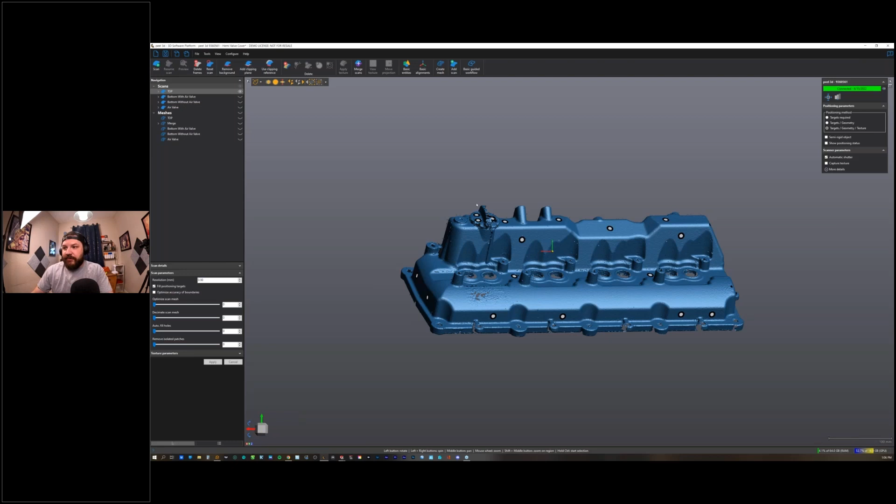For example, if I were to show this cap right here, I can scan it all together, and with this cap I can then export this target matrix, bring this cap, take it out completely and start scanning it, and it'll recognize that it's right here. Now this is probably a harder example because there's only 3 targets. You probably want a minimum of 5 for it to really catch onto the pattern, but I do have an example of what I mean.

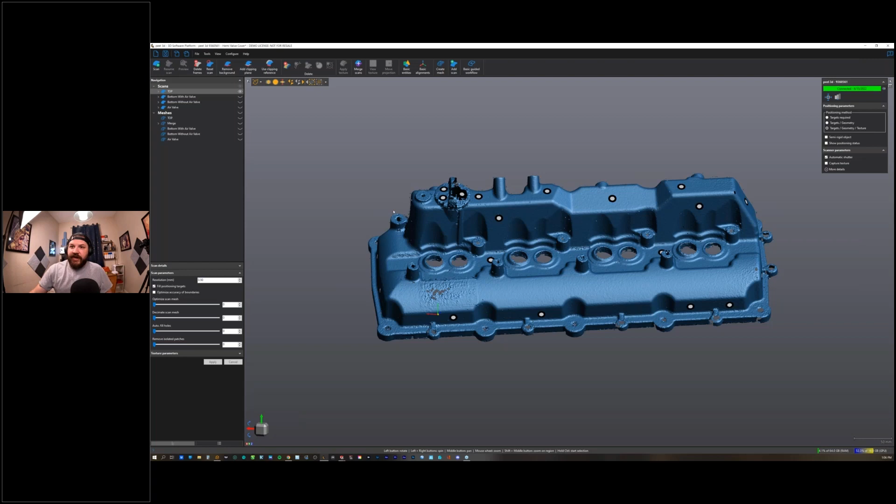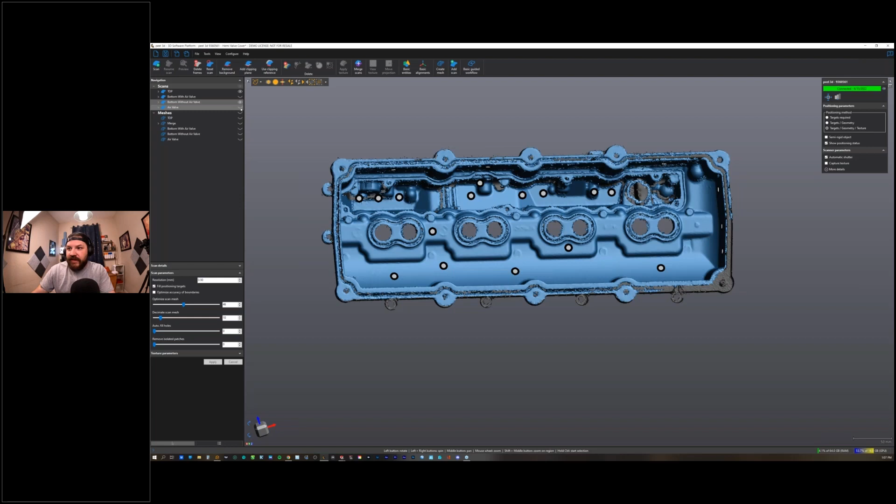So if I were to come and scan this bottom, which I did, you can see it has this valve dome right here for the air, basically for a breather. I scanned it in this position, and then I was able to actually take the cover out, but I'd leave these scan targets in. So whenever I come to the valve portion, I can then just scan this all by itself and it'll show up in position exactly where it's supposed to be.

So this can be used if you were scanning a wheel on a car and you're scanning the whole car but needed as much data as possible. You'd target up the wheel and the tire, and target up the car. You would then export your target matrix and start a new scan. When you start a new scan, you import your targets, so it would be all the targets you had for the full car. You can then take your wheel off, put it on the table, and start scanning it there, and it scans as if it's still on the car.

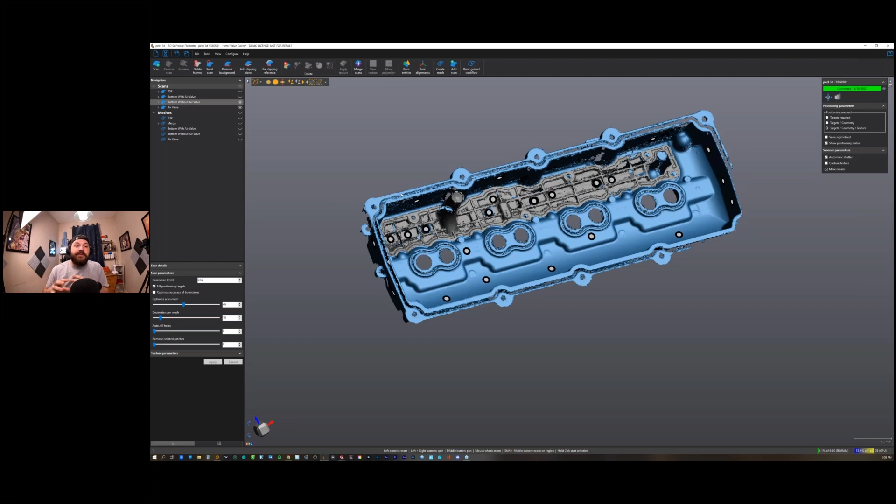So I do this a lot when I'm doing interiors. I would scan all the interior components that don't move, but when it comes to the doors, I can then scan the doors separately and be able to get under the jambs, into the hinges, all around, basically just get way more data and have it be in place than if I were just scanning it normally.

So we can kind of go through a project. We can start scanning this, and I can show you my workflow of where I would start. What we'll do is start a new scan. And what I meant by importing the targets is you just come to import, and previously, like this would be my last one that I did with the air valve.

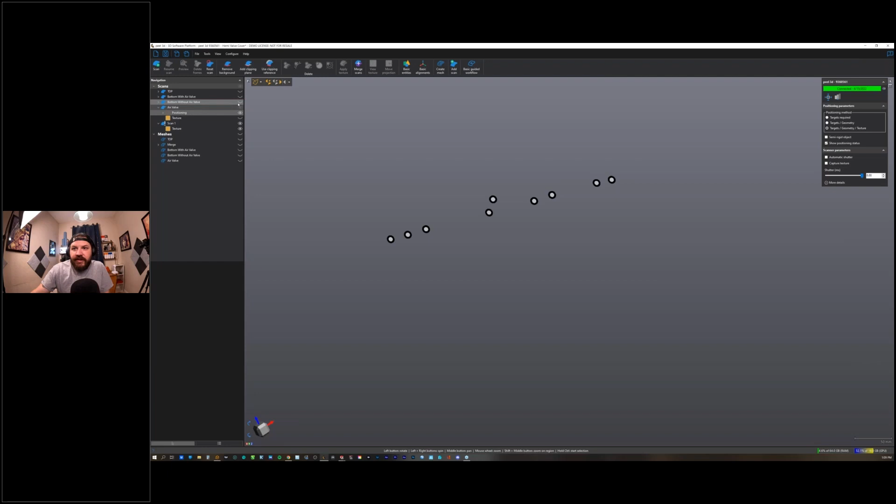If you see, it would probably be this one that has just all the targets in it. I usually, scan by scan, export these positioning targets as I go. This has basically all the targets that I have on the part, and then you just come to export, and you export positioning targets.

You can see right here, as I went along, I have my different alignments, and then just my subsets of targets as I collect more and more, because I don't like to overwrite the files. They're really small file sizes, so I just like to keep them in succession for redundancy.

So when I come to the new scan, I will import the positioning targets, and I'll go with my latest. And you see it brings in the targets.

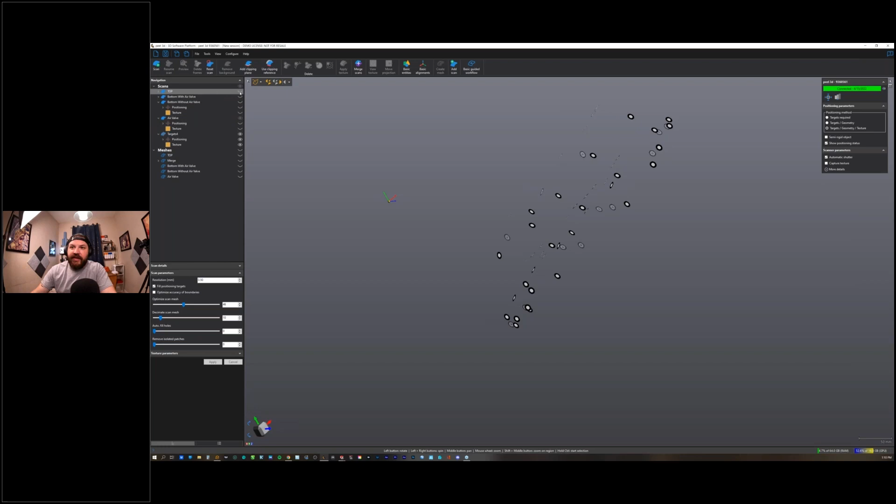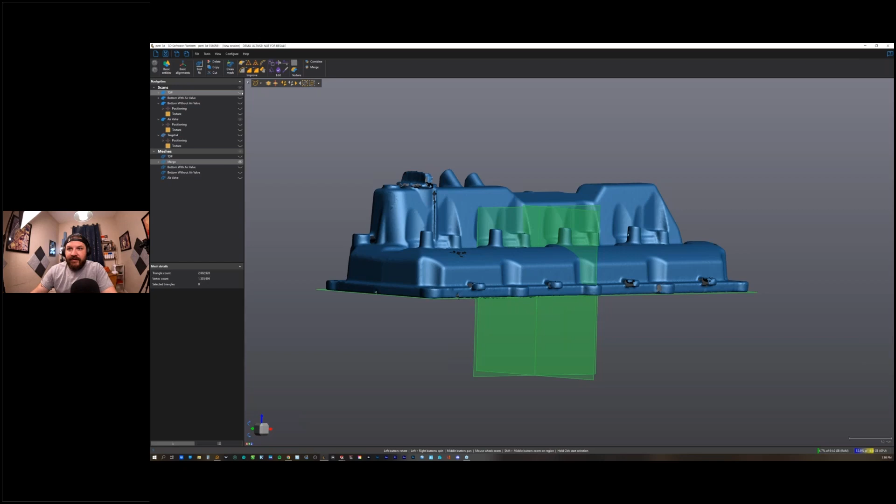And even going a step further, if you were to bring this top into the meshes, and you'd already gone through the process of reorienting and realigning and getting it so that it fits exactly where it's supposed to, you could then take this alignment and apply it to your scan, because that's where it originally scanned was.

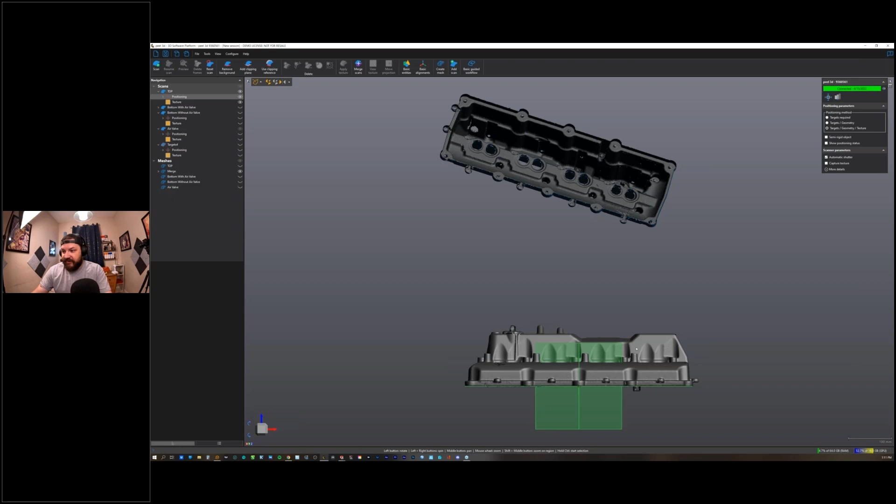And then you can export your targets again, and now all of your targets and everything of that nature is going to show up exactly in your predefined orientation. So that's basically a quick bypass of my workflow, but I'll try to show you real time as best as possible.

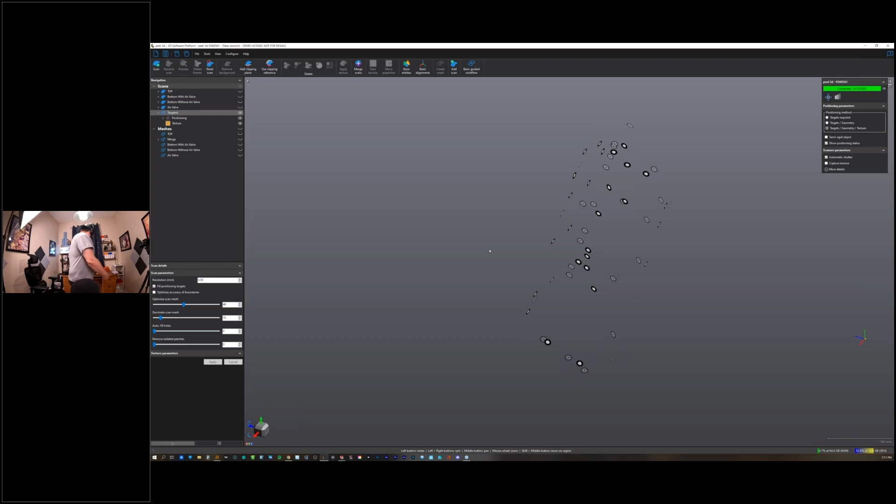So we have some new targets and or a new scan. I hope you'll be able to see and hear me, my mic is stationary. I would come, import the targets, and hit scan. So now we're ready to scan.

As you can see, I have a valve cover right here, and I have it on a turntable. This is good for small parts and little stuff like that. I also have these, I think they're called paint pyramids, little pyramids over here too. I have targets on them so that they'll just be more reference data as you go.

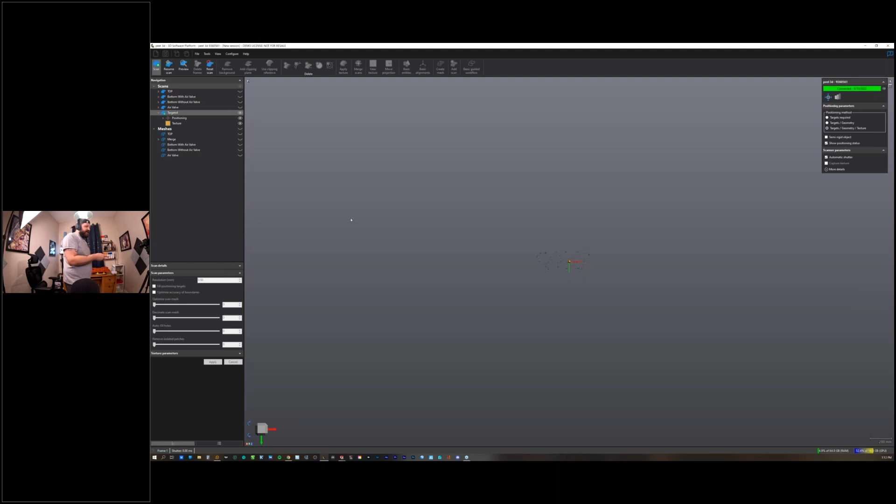It gives you a small little point that you can raise your part up on, and it makes it easier for cleanup and just keeping it off the ground so that it doesn't collect any of that data off the floor and mesh it up around the edges. This is a cool little trick and hack that I got on Amazon, just these little paint pyramids.

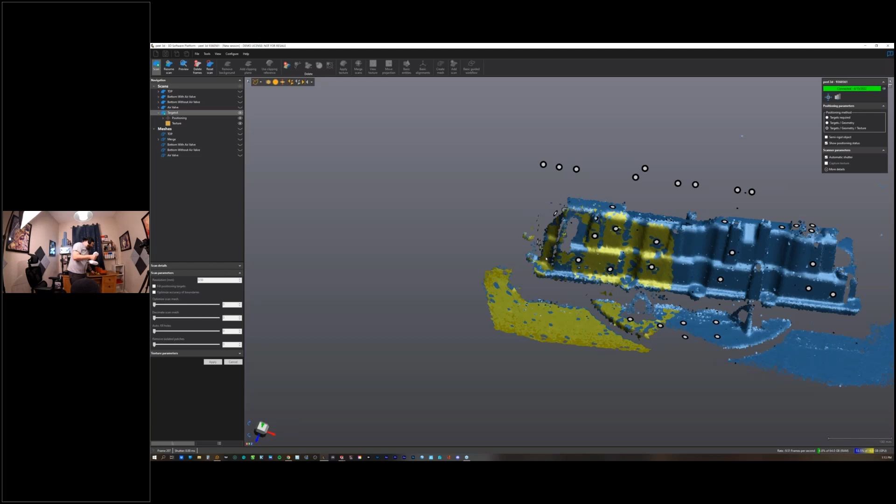So again, you can see that I have my positioning targets. So then very easily can I come in and rescan any of these parts. There we go. And that lets you, the more and more that you use targets and bring these parts in, and the more data that you can get, the easier it is just to merge meshes together.

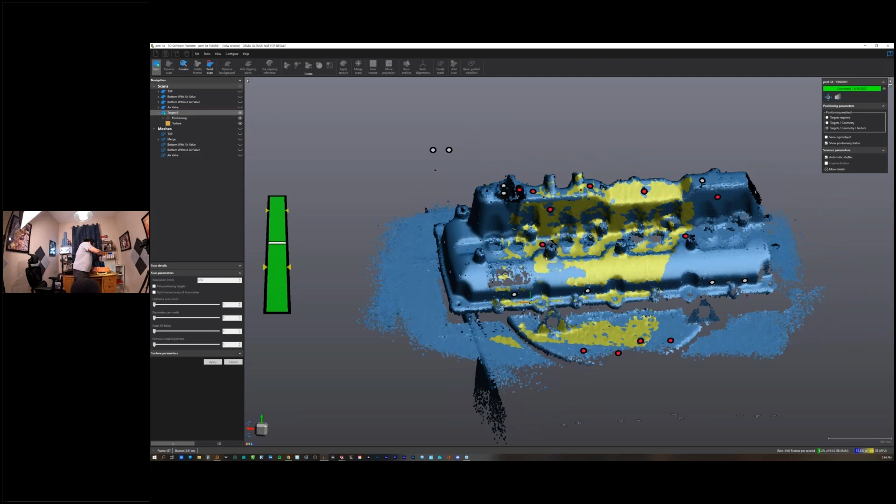So if you ever do have any issues with it being shiny or just not picking up, I recommend this, it's a scan spray. This is by a company called AESUB. They have about 3 or 4 different kinds, and they even have it where you can shoot it in a big gun for big projects. If I was doing a whole car, it's a pneumatic gun that you pour the liquid in, just a pneumatic paint sprayer.

But all it is, is a very light coating. It says it's just basically like a light dusting of very, very fine snow. And they've done testing on it to where you cannot measure a difference between the scan spray. Does not affect the thickness of your part or anything like that. And the best part is that it sublimates, which means it dissipates over time. So I've used this on $500,000 cars, and you're not going to have an issue.

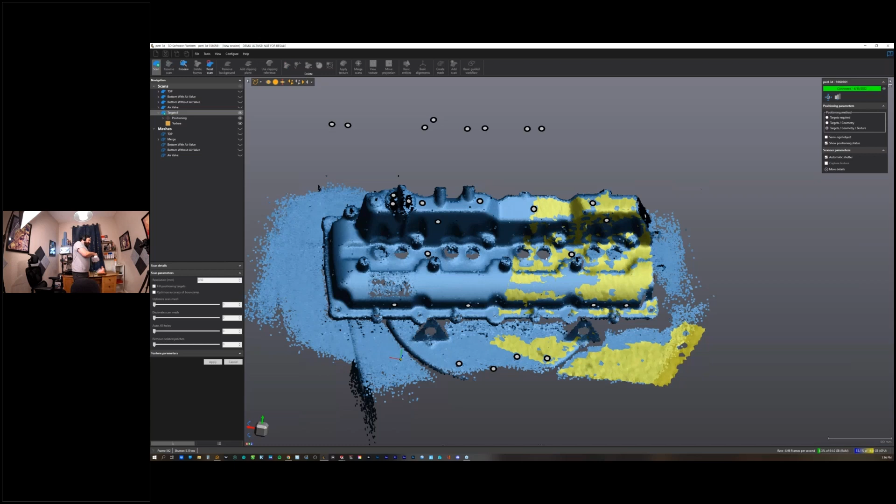But it does severely increase how well this scans. So it's not always needed, but it's definitely a tool that's always good to have. Like you can see for that spout right there that I'm trying to pick up.

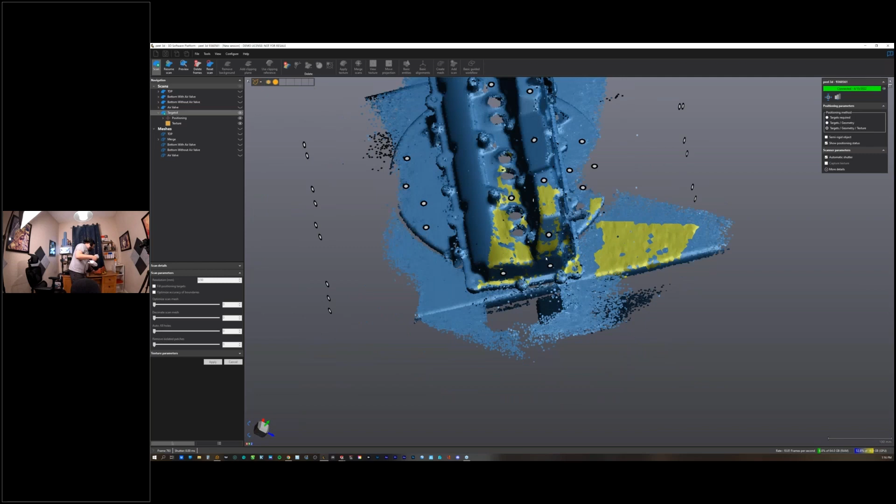It doesn't quite pick it up because for one, it's a different color. So you'd have to kind of sit and hover, especially if you're on automatic shutter.

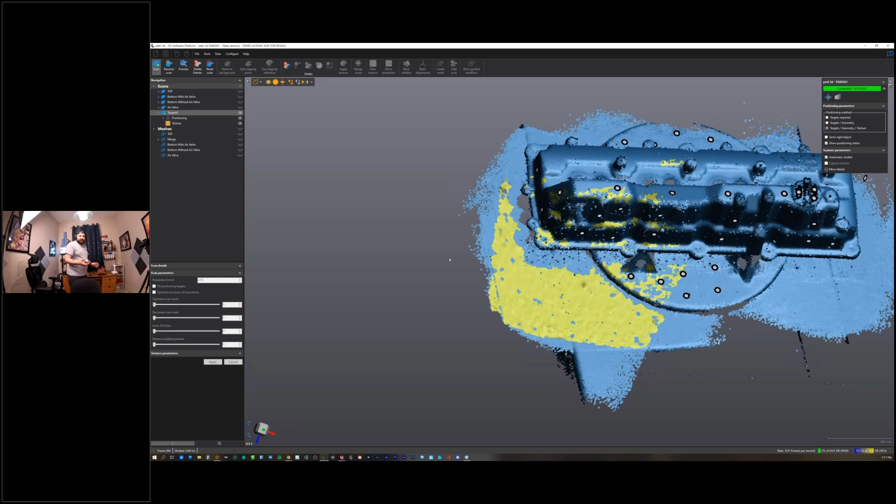What resolution are you scanning at, Jeff? I believe I'm scanning at 0.5 millimeters. Okay, that's so good. Typically, unless it's like a big broad side of a car or anything like that, for anything with small detail, holes, and intricate data, I usually go for broke and use the smallest resolution possible so that I can get the most data possible.

But as you can see, it's not quite getting this little spout right here. If I were to spray it, give it a little bit of love with the spray, you can see it picks it up a lot easier.

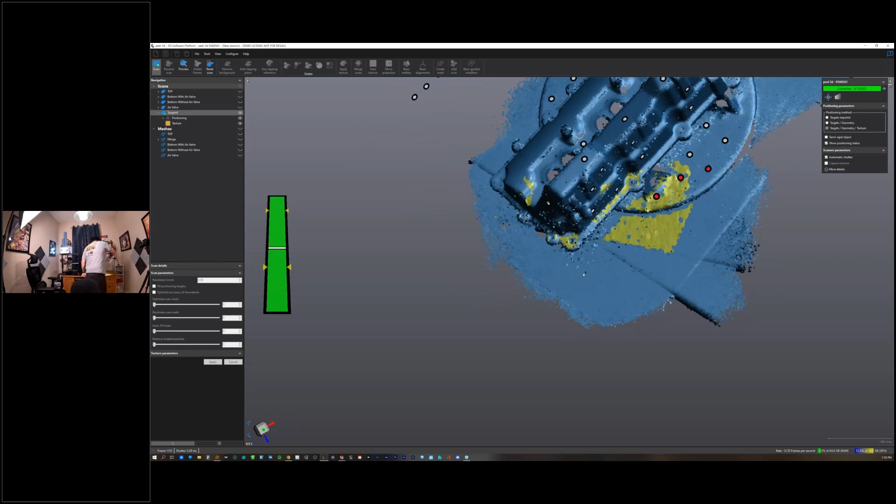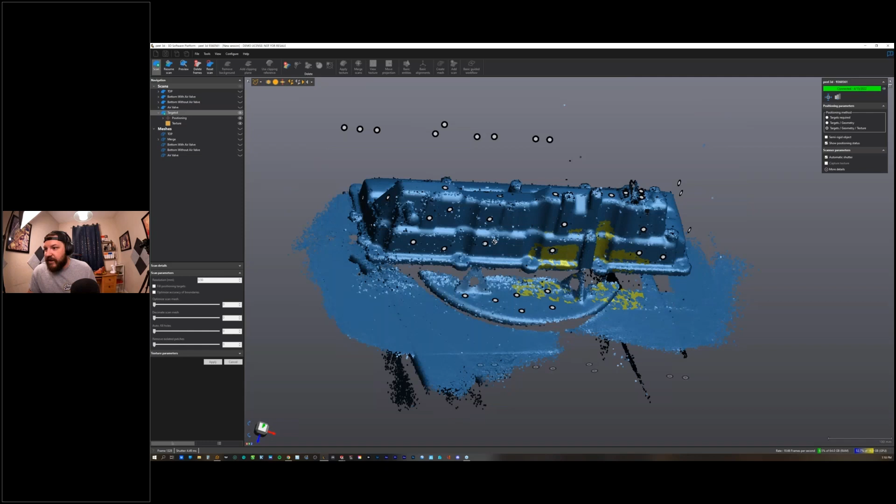Since I have automatic shutter on, I kind of want to sit and let it hover over and let it pick that up. But as you can see, it then began to start picking up that spout, which is actually kind of a shiny metallic silver. Since I was on automatic shutter, if I let it hover around more, it would eventually pick up all that.

And then from here, let's go ahead and stop. It's going to take a second to update, but I'll show you my cleaning process from here. Yeah, when we're in preview mode, it always looks a bit blurry. But don't worry, everyone, it will clean up better than that.

Yeah, it'll just take a second. I've got a lot of resources going on my computer right now with the scanning, the webcast, and a few other files that I have ready and open.

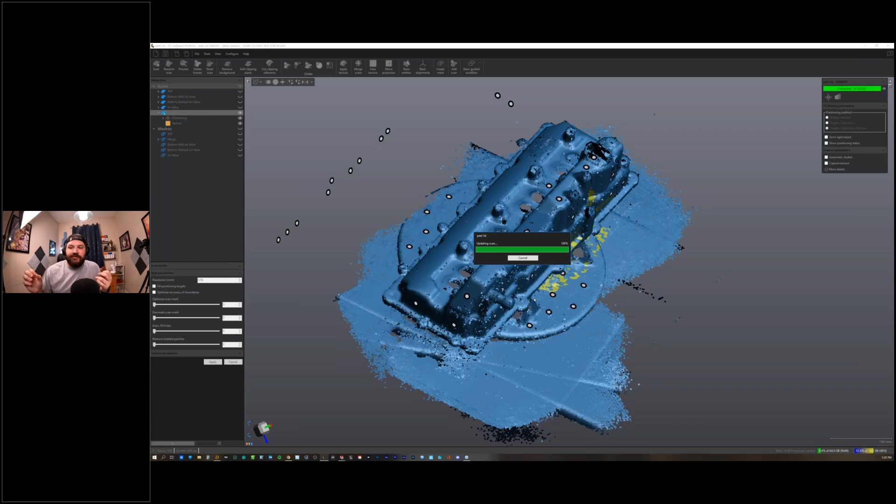Typically on my computer, one practice I like to do is having just a fresh state of the computer. I try to have as minimal services running as possible, and I try to do a fresh restart to keep it going. I'll even turn off the internet, and I have a few other programs I use to basically limit the services of my computer, because I want this thing running as smoothly and efficiently as possible, not waiting around. I don't need to be checking my Facebook or anything like that while this is all going. The quicker I can make my computer, the more dedicated processing I can give to the software, so the snappier it's going to be.

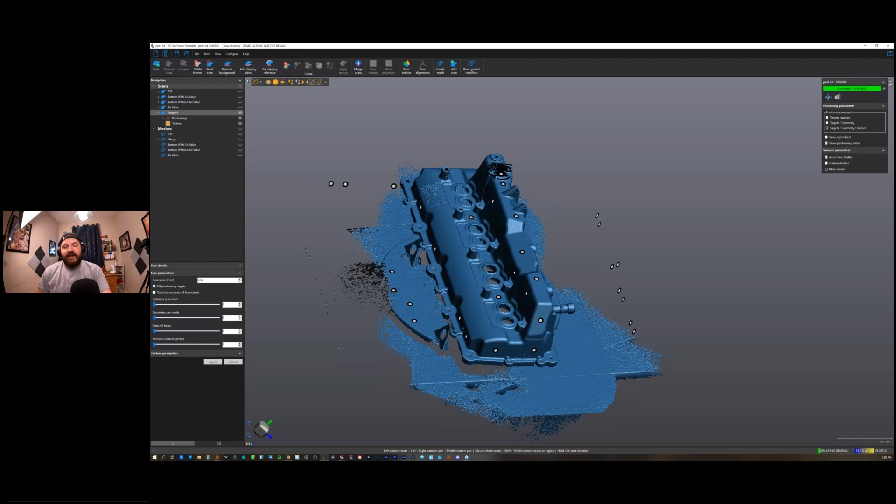I can tell you, I've used a fair amount of scanners, and the Peel software is definitely as snappy as they come. It's very impressive how much data is actually in all of this.

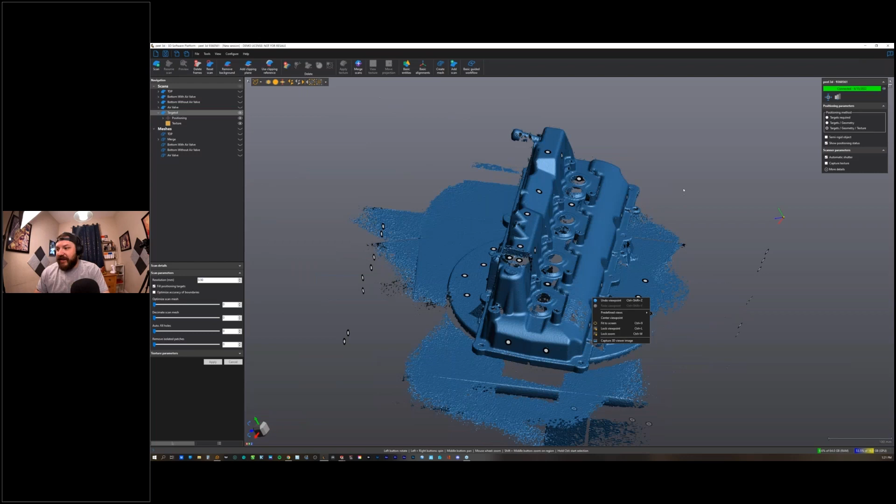As you can see with the triangles, since there's a point, and I didn't quite get under there too much because I'm really focusing on scanning the top, that makes cleaning up a lot easier. So I can just come up to Connect and basically grab all the important stuff that I need.

I don't need any of this down here from the table or anything like that. I can just go and keep only, and that's going to run and delete all that table. Apparently part of the cap that I have on there looks like it too, but that's not a big deal.

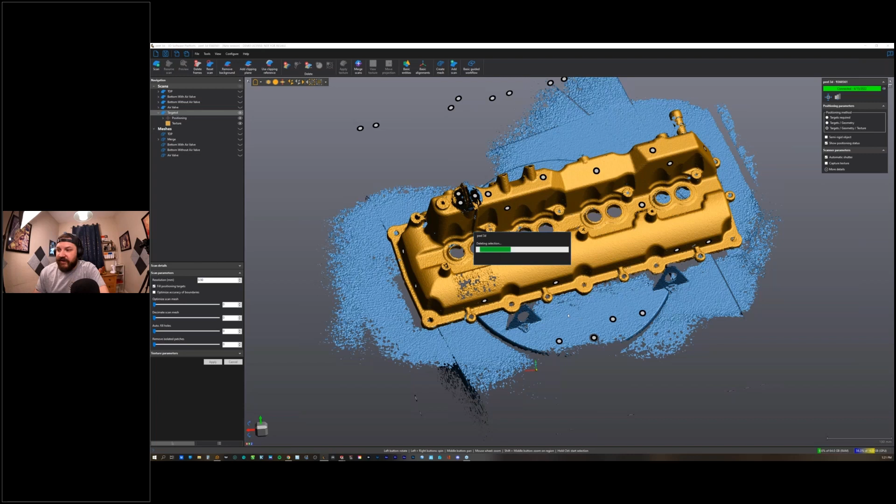But yeah, that's the big benefit right there to those little pyramids. Because if it was just sitting on this turntable or on the table, I'd have to really get in close and trim away all around here. I'll tell you too, if you do have holes and fine details - I'm doing this just for the sake of it being a little quicker - but you can optimize your scan mesh and optimize accuracy of boundaries, and you'll get a lot more accurate boundary data as it goes.

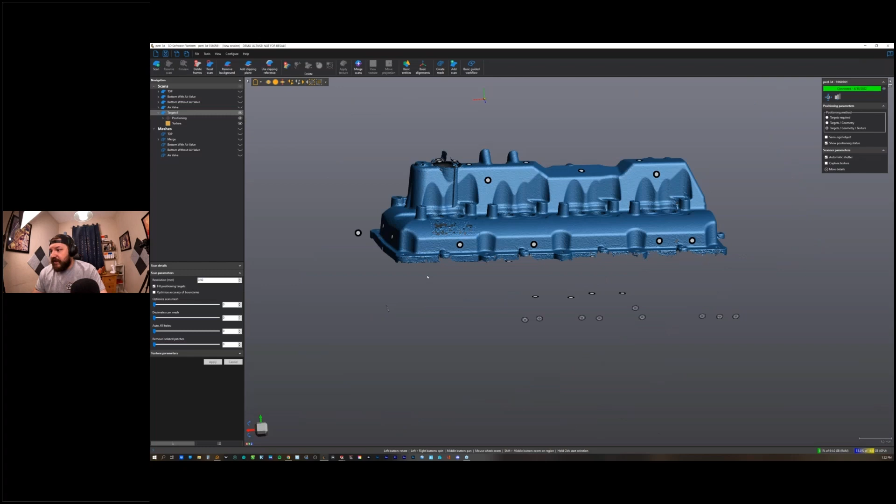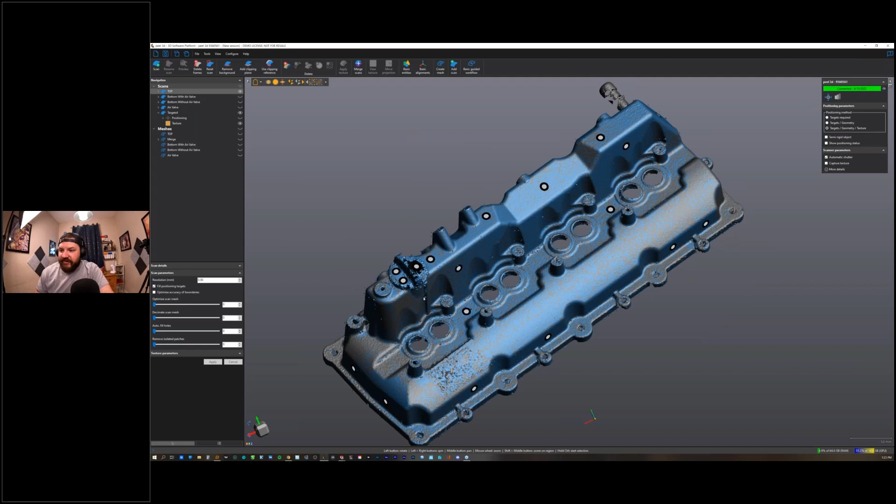So here's that scan. Just in the 5 minutes or so that I was showing you, I have a really good base already. If I were to take that, and say I've scanned the top already before, it's just more and more data that you can eventually merge together and really make sure you've captured everything.

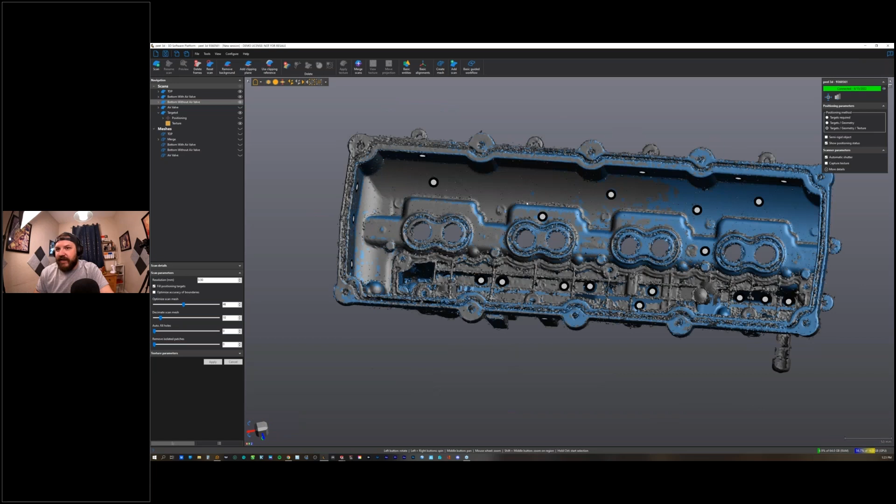So then you can start showing the bottom, and you can see that multiple arrays of data, when you merge that, you'll have just about everything on top of this part that I could ever need. Like I said, if I were to have the optimized accuracy of boundaries, which just takes a little bit longer - and I don't want to just be sitting here watching this thing load - you would have very, very accurate data to bring in.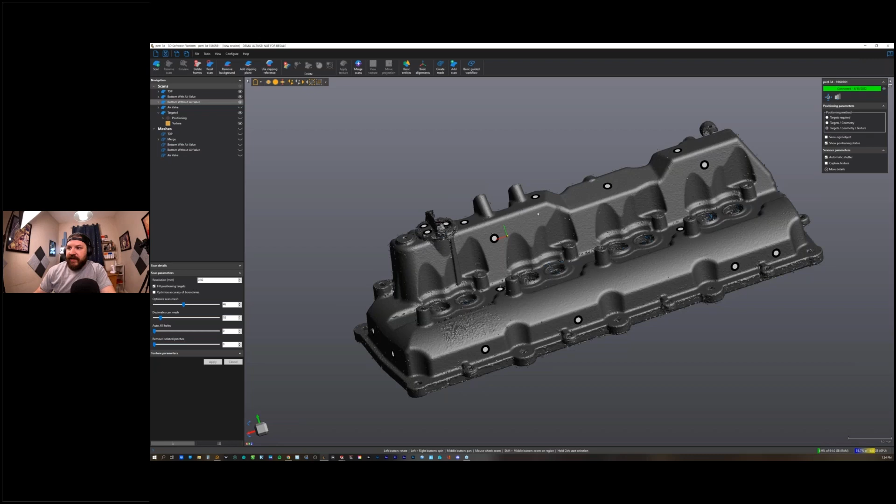So I actually have a different software than the Peel for being able to manipulate the mesh and stuff like that. This is the Peel software right now. It's on a demo license that's not giving me all the tools up here.

So I'm going to switch over to that real quick, and it'll give me all the tools that the Peel software does have. So Jeff, basically we'll be using a VXmodel from Creaform. It's the equivalent of our Peel to CAD. There are a few differences, but most tools and principles, ideas are the same.

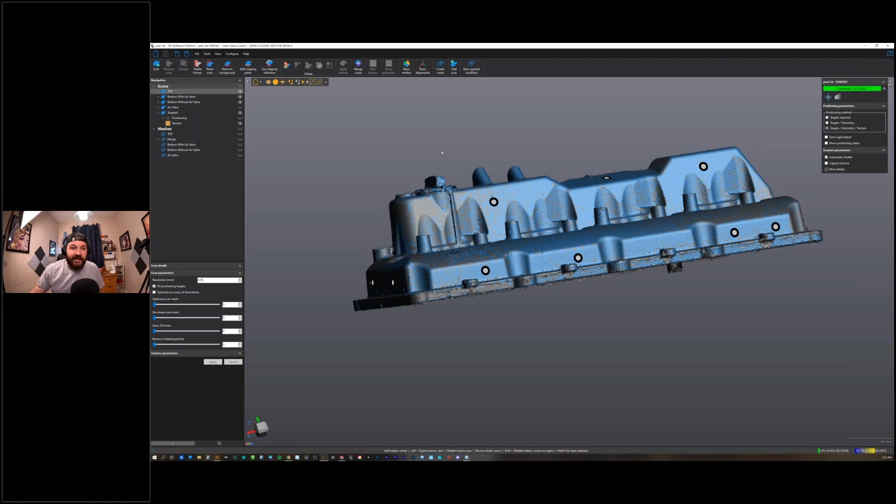Yeah, it's mostly user interface differences. I haven't noticed, and maybe you can tell me, Marie, if what they are, but I haven't noticed any of the tools being different. More or less, just kind of the layout of the process of scanning with my Spark is just a little bit different than scanning with the Peel. But when it comes to the tools and all that stuff, I haven't noticed. There's no difference in the capabilities.

So we'll open this up, and like I said, all the tools are the same over here as the Peel. So yeah, the first thing that I would do in cleaning this up would be to come to clean mesh, and I'll even lower the parameters.

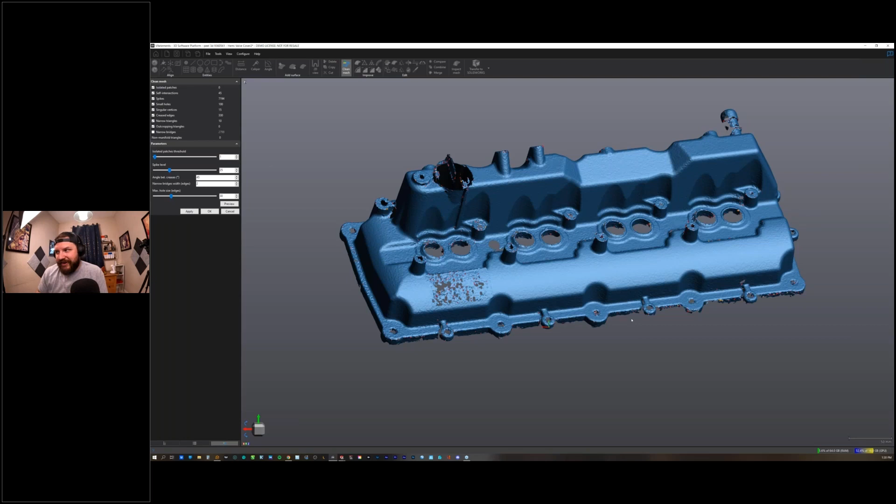And I typically don't go with the automatic isolated patches. I'll do it on one, which picks up very, very little, just because I like to choose myself what data it deletes rather than it just being kind of automatic.

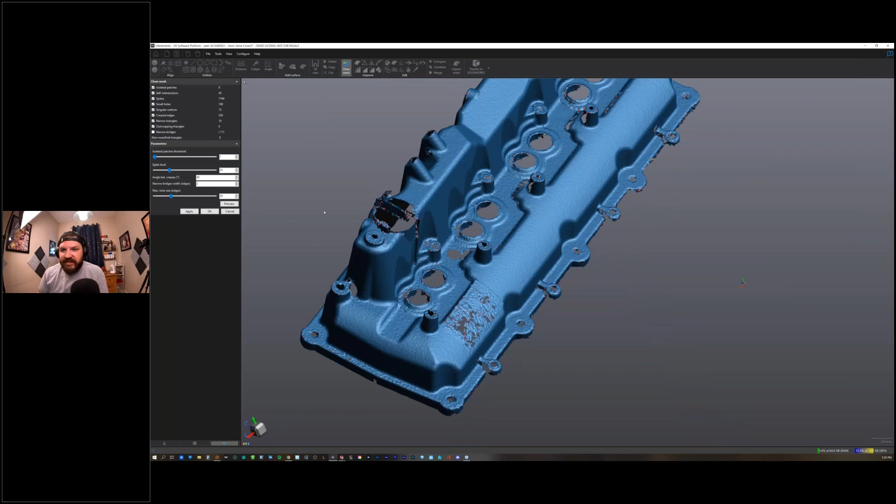I will do it for the max hole size. You do have to be careful, especially with working with parts that have holes in them that you need to take advantage of. I typically leave that around 30 or so, but you can always ramp it up, and whenever you preview, you'll see all the yellow around are all the holes that it's going to fill automatically. So you just want to be wary of making sure that you're not filling in any holes that you don't want.

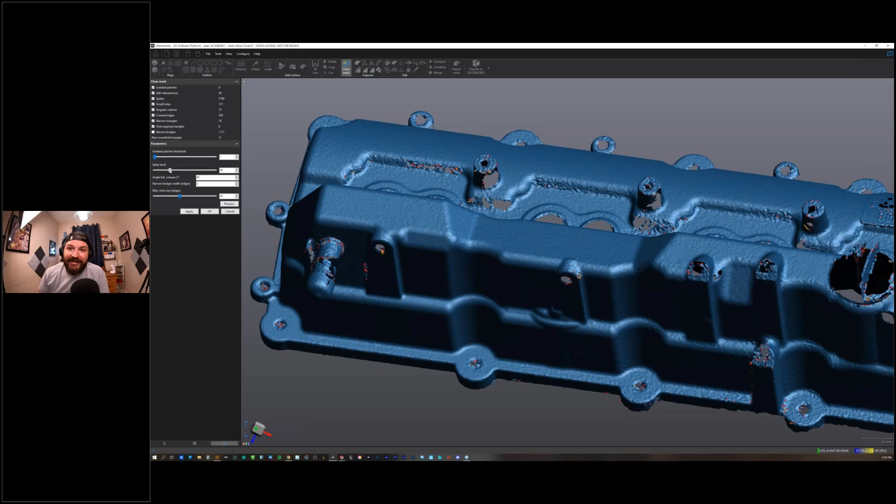And then for the spike level, I typically like to ramp that up and kind of get a lot of the noise reduced a little bit. That'll be my first process, and let that run and take care of all that, any kind of creased edges or intersections or anything like that, and it just cleans it up a little bit, gets a lot of that dirty data out of there. That would be my first step.

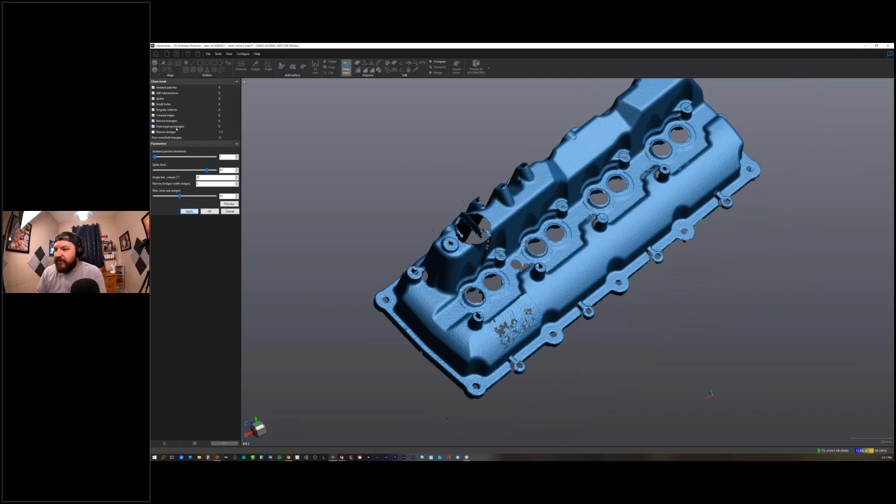And then I would come over here and click this little widget here on the bottom, and this gives you a lot more options of viewing. So one trick of this that I didn't realize was there for a while was clip view. And this comes in handy in scanning too, especially for me whenever I'm doing interiors of cars, like say I've basically scanned the entirety of the car and I realize I don't have some data over there on the kick panel.

But whenever I try to scan the kick panel, it just basically shows me the back end of the cab and I can't see where I'm scanning. So what you actually can do in that case is it basically orients to the projection of your screen, and you can clip view, and it just slices right through.

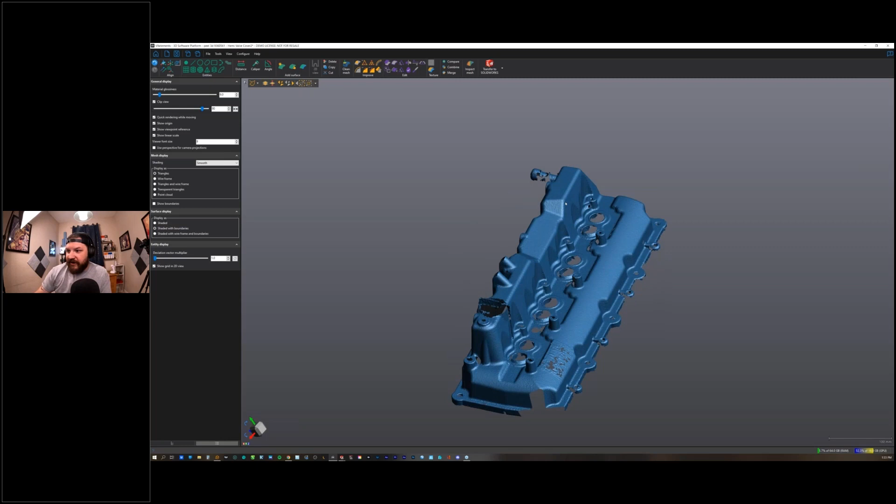So if I was looking at that kick panel, like say the kick panel was over here and all the cab was right here, I would be looking at it in whatever angle I want to and just hide all that data, and now I can start scanning the kick panel or whatever you need.

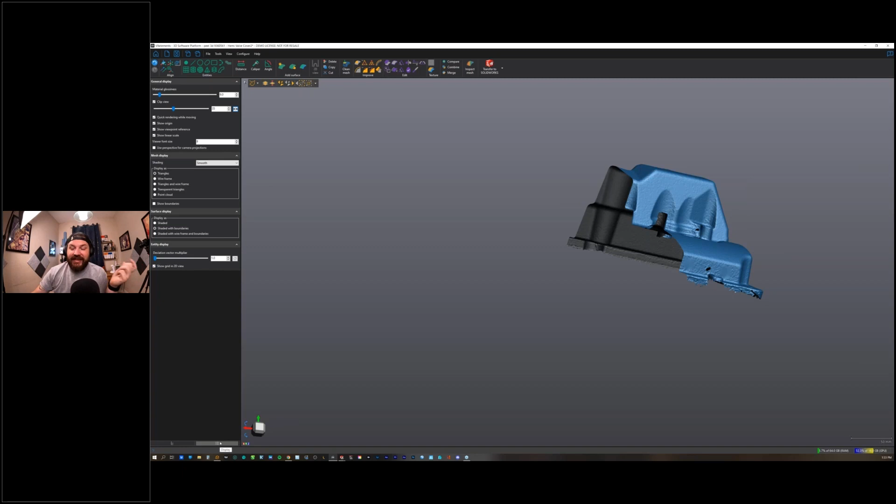But I actually didn't know that was a feature for a while, because honestly I didn't know this little toolbar down here was down here, and you can access this even when inside of your tools. So that can become really handy for whenever you need to get into those hard to see places.

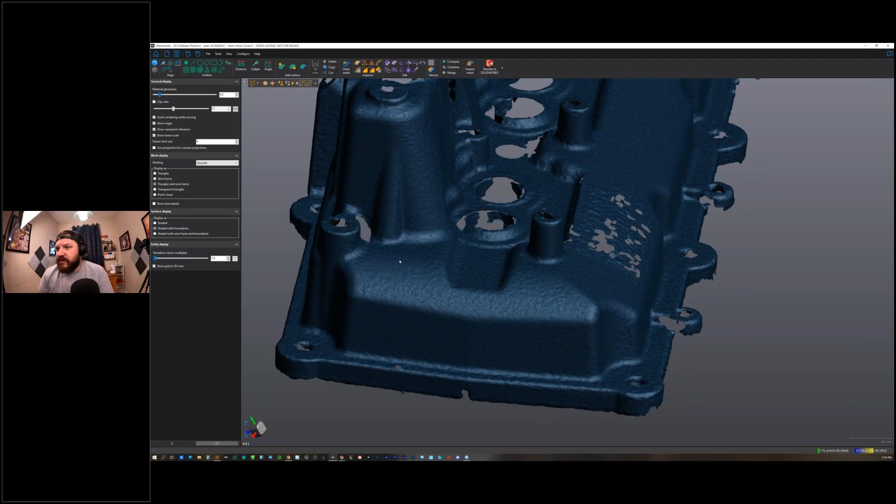But you also have your viewing options here too. So sometimes I like to come in here to be able to see how the triangles reacted and how the mesh is working on it, especially when it comes to decimating and stuff like that. It gives me kind of a nice visual cue of just how clumped the data is.

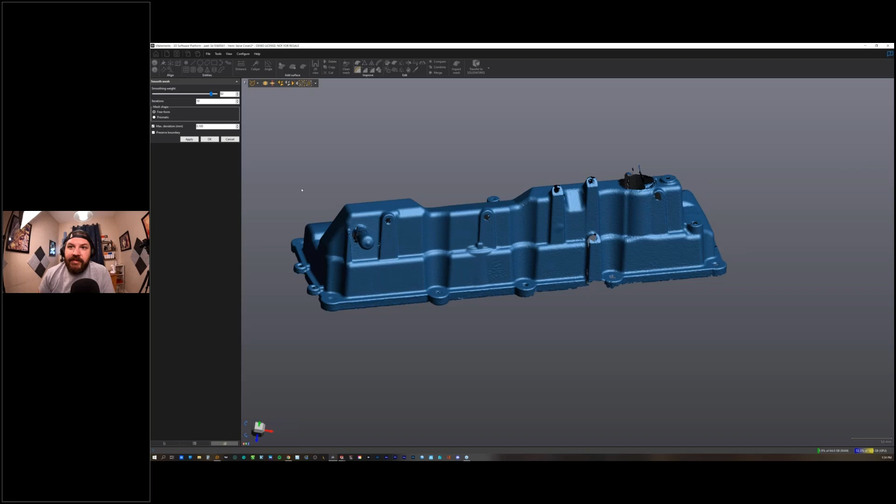Typically, I will go through a few more steps similar to smoothing mesh. So I'm usually not afraid to put the smoothing weight pretty close to top, and I'll run through a few iterations of it to make sure nothing gets distorted too much.

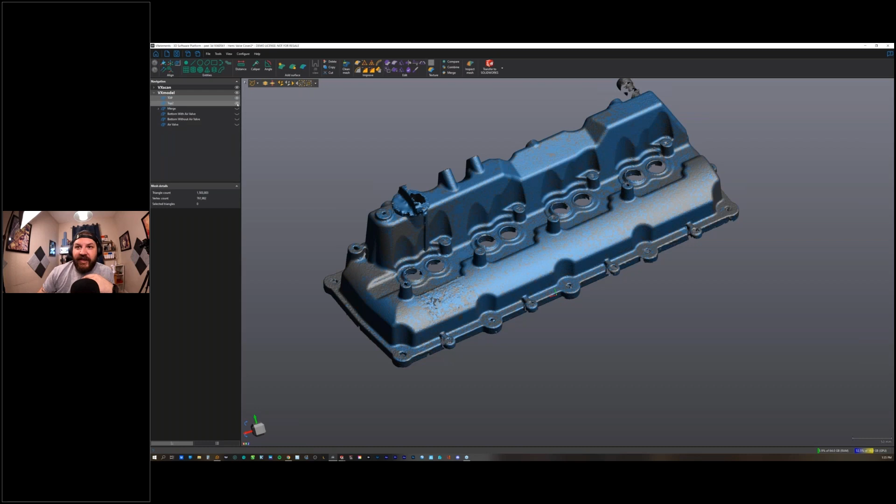Another thing I like to do, that I didn't do in this case because I've already done it, is whenever I bring this from the peel scan to the peel model, I'll usually take that first scan and basically not touch it. Then I'll duplicate it, and that gives me a master of all the data. That way, in case I delete anything, it's a backup, and it's actually a redundant backup because all the original data is up here in the scan.

But what I'll typically do on that first master, which I'd name 'master' as I go, is probably just do that first initial clean mesh, just so it gets rid of a lot of the noise and the basic stuff. But I don't want to start manipulating the mesh on it until after I duplicate it.

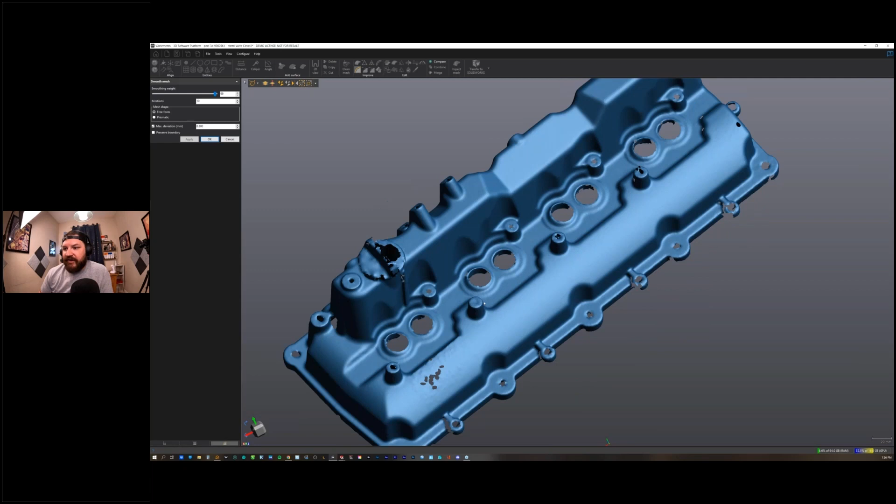That way, especially when it comes to smoothing, let's go ahead and smooth this out. Like I said, I'm typically not afraid to run that up, and I'll typically do preserve boundary. I'll play with that depending on how well all my openings are. If it's a really crucial part, I'll keep it pretty minimum, but if it could use a little love, I'll iterate it up to 0.2 or even 0.3 sometimes. You can see once I apply it, it really takes a lot of that noise out. Even at 0.1 it ends up generally smoothing it all out. But I'll typically go between 0.2 and 0.3, especially on outsides of cars. You'll get a really nice mesh that way.

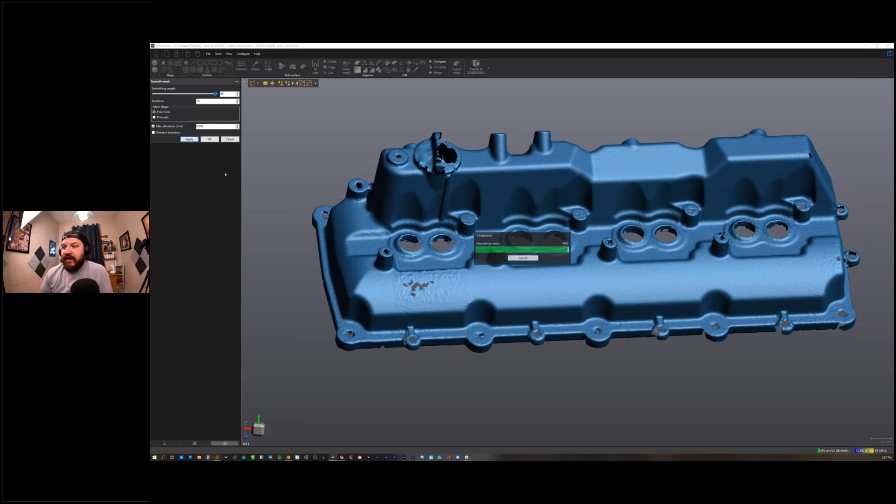And this is why I like having the masters, so I can toggle and make sure nothing's severely changed out of whack or anything like that. It's not going to move stuff around so much that you're losing data. It's just a really good tool.

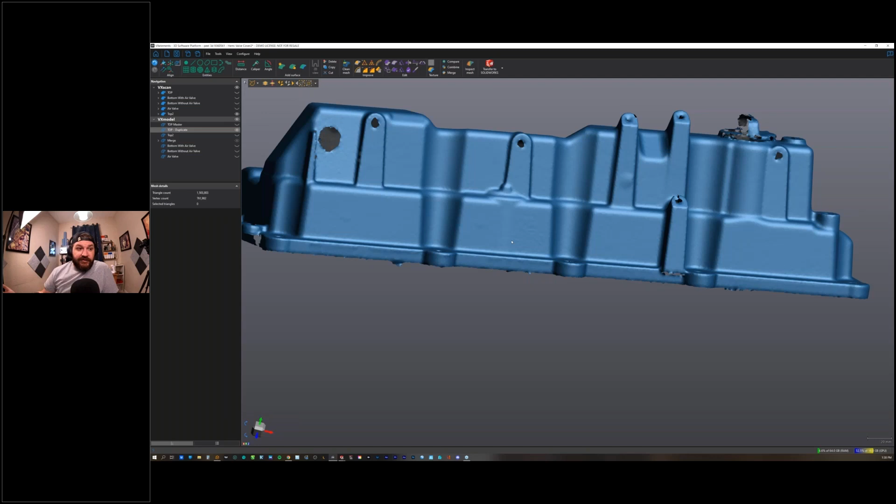Another tip with your targets: when you're placing them, keep them away from edges. If you think about it, whenever you're scanning, it doesn't actually get the data of the target — it puts that target there, and whenever you finalize or end the scan, it will fill those target holes. As you can see right here, I have this target, and I can bring it over.

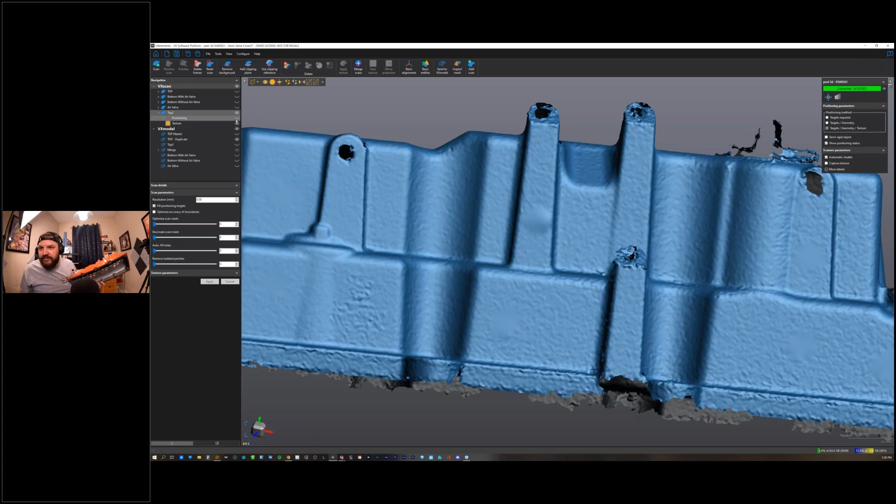This target right here is just a little too close to that edge, so whenever it was scanning... let's see, I go to top 2. Oh, I can show you right here. So if I were to turn these targets off — oh, it's already done it. Typically, if you're still in the scan, you'll be able to just see a hole.

So basically, you just want to keep those away from edges. You don't want to wrap these targets around corners or anything like that. You just want to keep them — the best practice is to try to find nice flat spots. That's why I avoided this area right here, because it has kind of a roll to it. You can put them there, it's not going to be the end of the world, but since this had so many flat surfaces, that's typically what I'd go after.

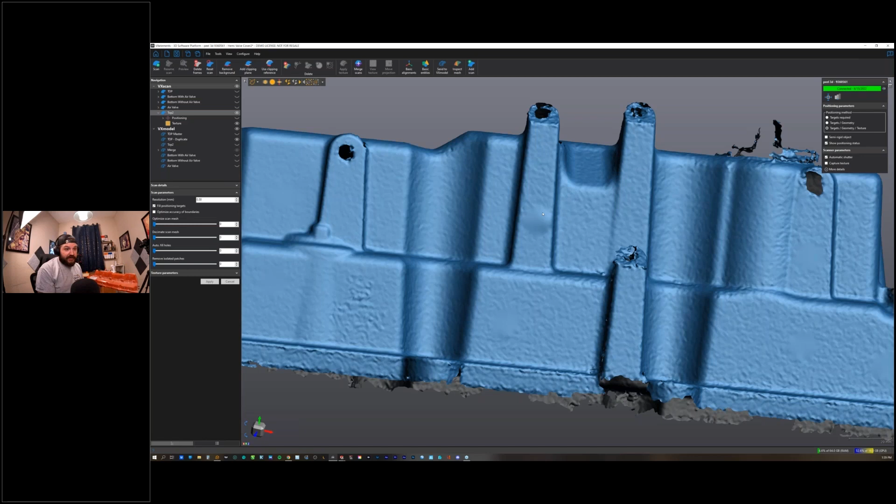So that's why that happened right there, just because I had that target a little too close, and whenever it filled the hole automatically — which you can actually turn that feature off too, if that becomes a problem — you can turn off the fill targets automatically and do it yourself with the power of the fill hole tool, or bridge it with the fill hole tool. You'll get a little more control that way.

And second, if it's just one... if it's a full car, I could have a whole box and a half of targets. I could have 750 targets. I'm not going to want to fill all those in individually.

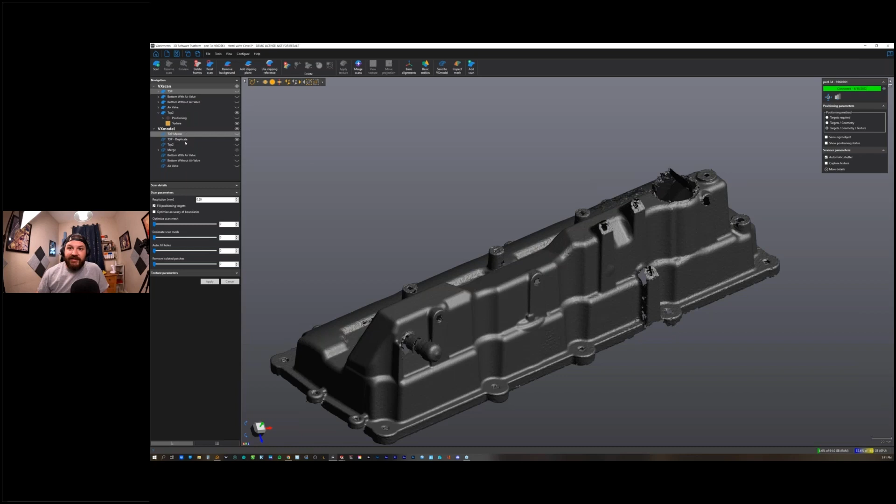So I could come up into the scan again, bring that piece in as another file, chop away everything, and basically just give me that little section of where that hole is that I'm avoiding, fill that in manually, and merge that with the previous scan. That way you don't have to do the entirety of the scan. The ability to copy and paste these models so quickly — it's invaluable.

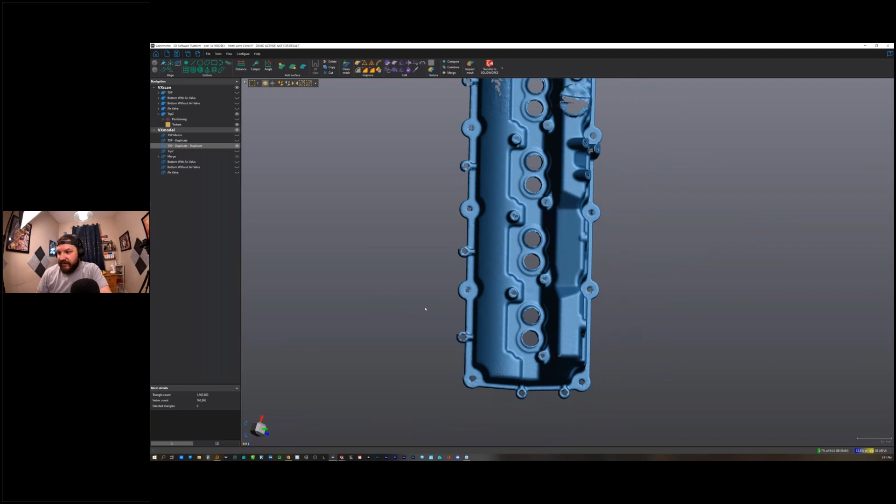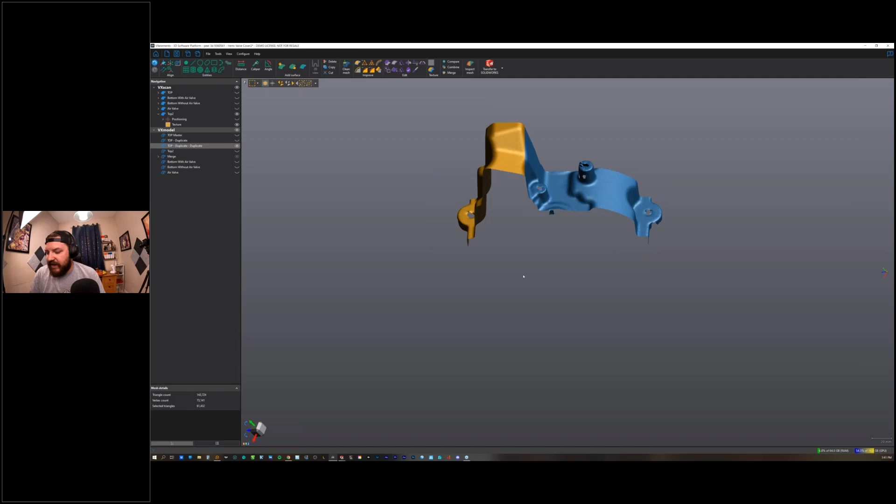Whenever I'm done cleaning up a scan, I'll have copies on copies on copies, because I'll take this and duplicate it, and now I can very easily come in and work on just a very small area, because maybe this hole right here is all I need for inside SolidWorks or anything like that. It's very powerful to be able to delete and work on just the one section you need, without slowing your whole computer down trying to work on just one little section. And since it's just a duplicate, I still have all the data, no problem. So it'll run smooth.

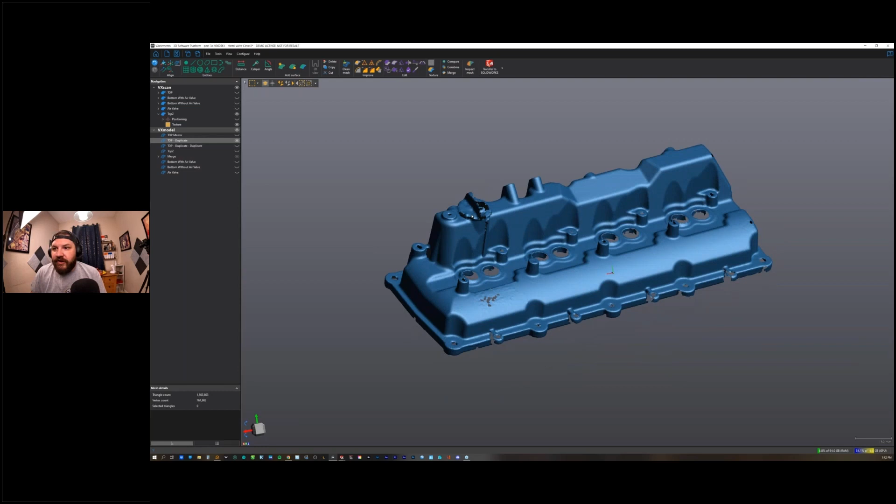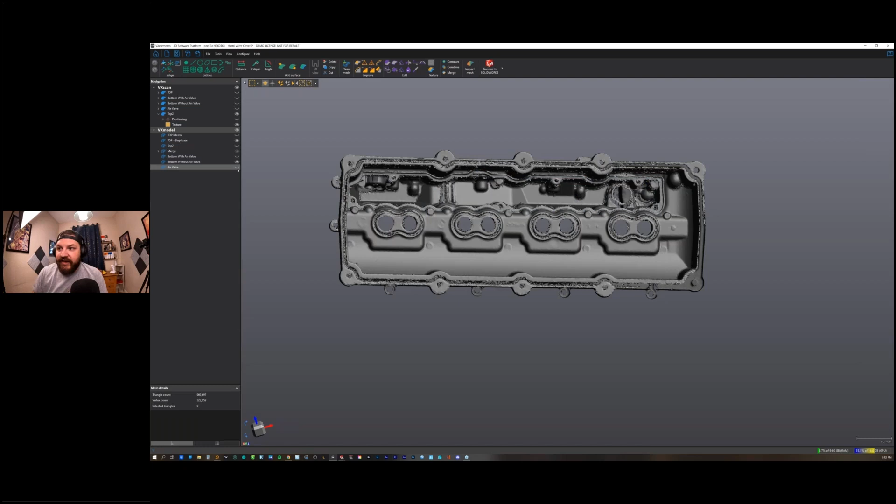Once I get to this point, we can start merging these together. I want this merged without the air valve, because I want the original part. I did need to scan it with the air valve in place so I could position it while scanning, but I'm not going to use that part to be joined with the scan. That way I can easily toggle it on and off. But as you can see, if I did it without the air valve, I did miss some area right over here. So I did miss some of this area, but I did get it when I scanned it with it in place. So what I'm going to do is duplicate that.

So what I'm going to do is take this duplicate, and I would chop out all the area.

Hey Jeff, yes, someone's asking, do you use the shell function rather than scanning inside and outside?

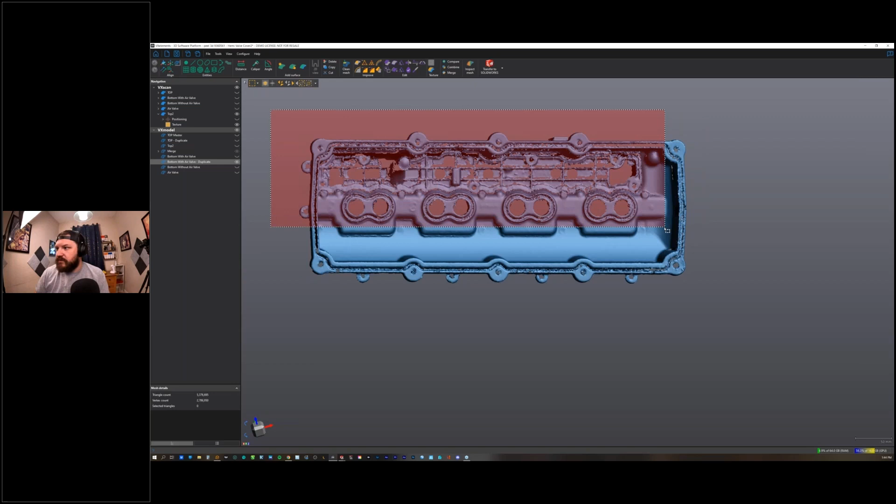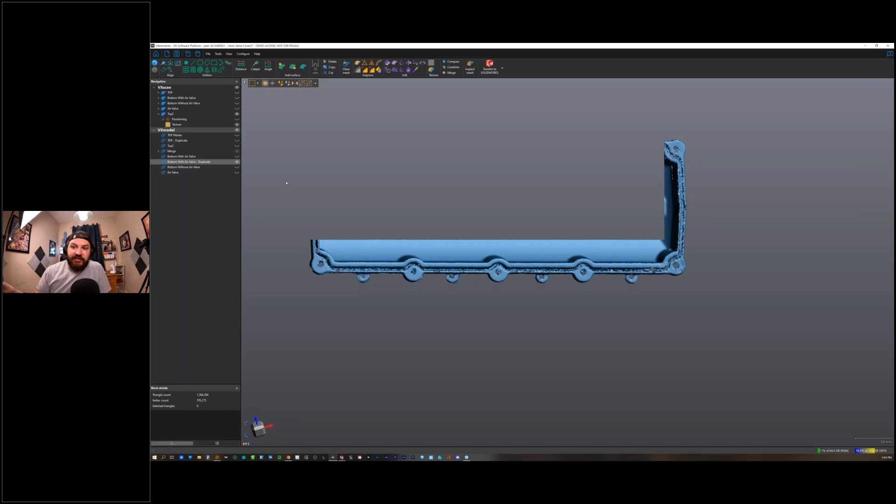I typically would use shell in my CAD software personally. I haven't used it too much in this software. I haven't had a circumstance where that would be more beneficial. I would rather have... I mean, this has obviously been shelled, but there's a lot of different thicknesses to the walls and stuff like that, so I wouldn't quite trust taking this and just shelling it inward and thinking that's as accurate as being able to scan the inside.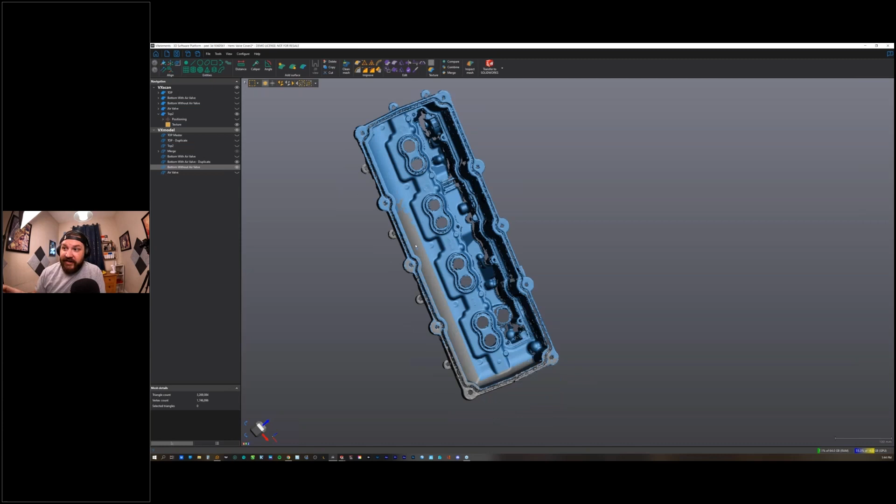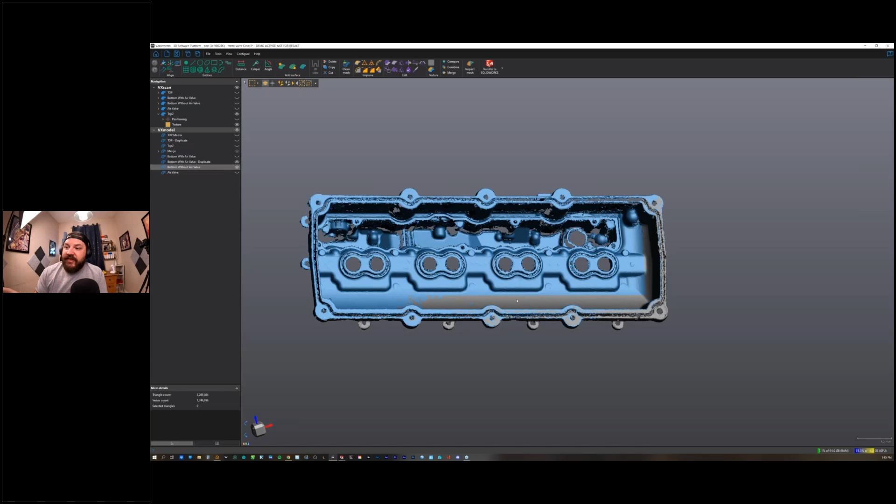Plus, in my case for this project, the outside doesn't really matter to me because I'm making custom valve covers for this - it's a Hemi Dodge Charger valve cover. What I really needed was the interior being accurate, so this is the part that's important to me because I want the same volumetric accuracy. Basically, I want this to be the interior of the valve covers I make, but on the outside I can make it whatever I want inside of CAD.

If I couldn't get the shell to work in my CAD software, that's when I would personally try using it inside of this. But that's just me, that's just my workflow. I don't typically use a whole lot of the edit functions inside - the only one I kind of use is offset mesh. I've used that before to basically offset the mesh, which is a lot quicker and easier than offsetting certain surfaces, especially in SolidWorks. SolidWorks is kind of clunky somewhat for scan data and for some of the surfaces that I bring in.

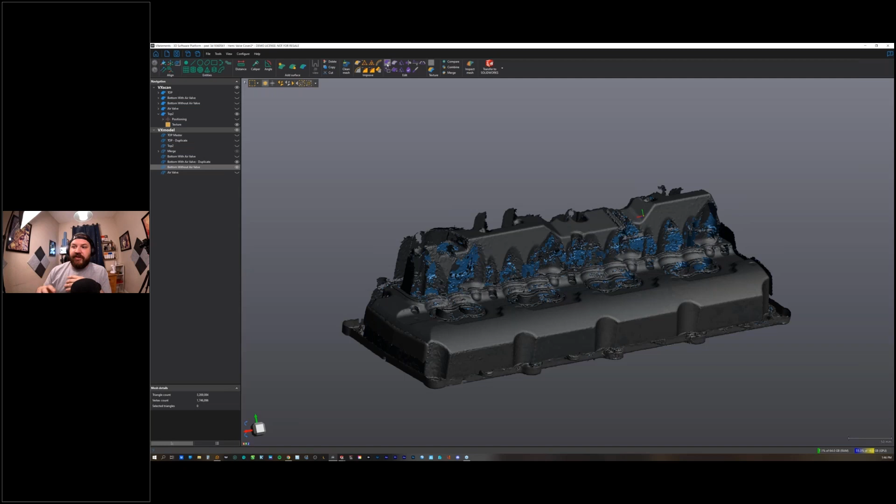So basically I would chop that area out and merge it all together, giving me a nice clean scan. Then I can start creating a plane on the bottom - I created a plane from the circles inside here, did it perpendicular to the bottom, and then a perpendicular plane off of this. Inside manual alignment you can tell it which entity you want to be which axis, basically. And then boom, now you have it all nice and clean and aligned.

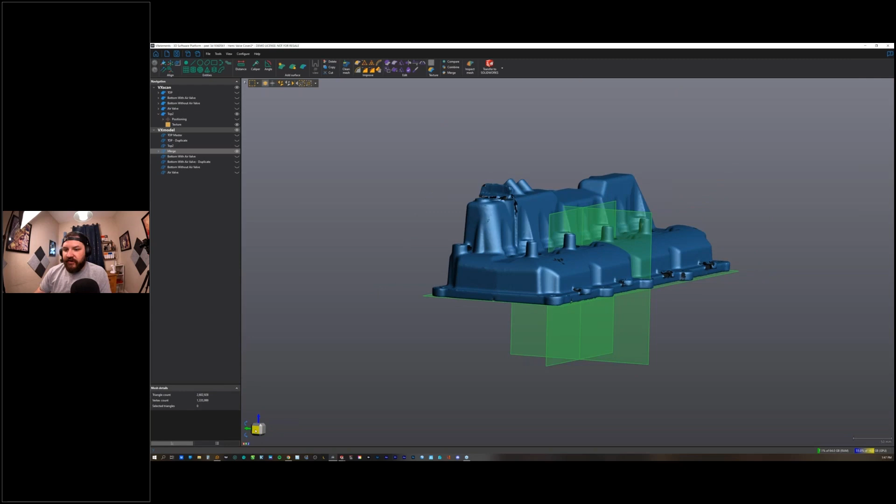I align it to match my gumball setup in SolidWorks, so that whenever I go to front, it goes to front, whenever I go to right, it goes to right - it's a uniform coordinate system across all the programs.

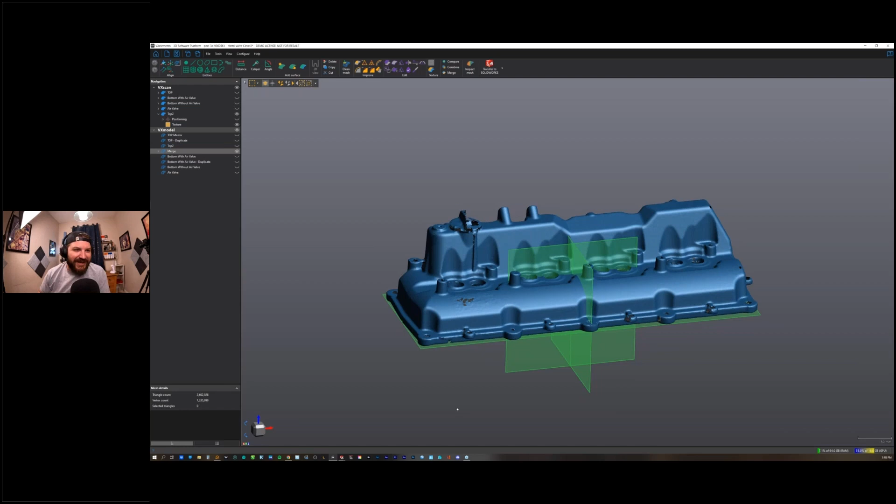So yeah, I realized I've been talking for probably a little bit longer than I was supposed to. No, that's perfect, yeah.

A quick question - for the cover project we're discussing now, would you send the whole interior or inside of the cover mesh to SolidWorks, or would you export like the silhouette or some cross section? What would you be using in SolidWorks?

That's a good question. So basically, to send it to SolidWorks or any CAD program really, the last step of my workflow would be to decimate. And again, I would take this last cleaned up version right here, and I don't know if I've done it.

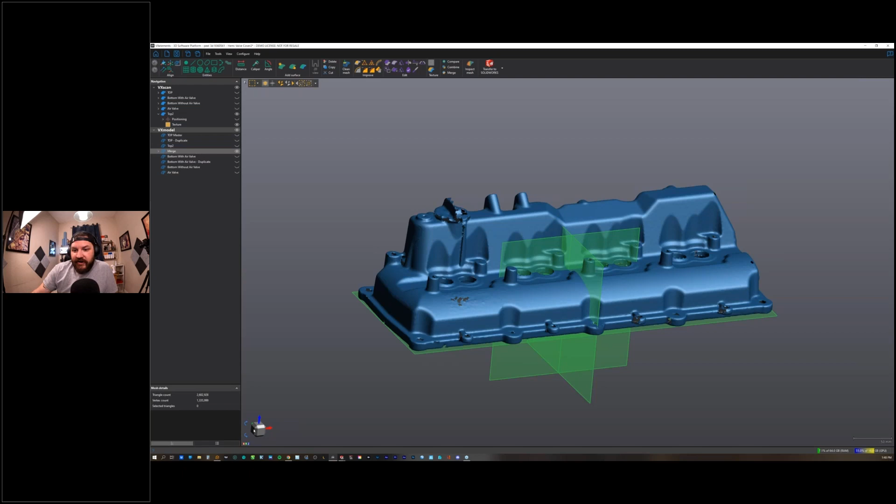So I haven't decimated yet. I would basically create a duplicate and call it decimated, just so I had the redundant version. I would decimate this because this part already has 2 million triangles, so I'd try to get that down to maybe 500,000 or so. That way SolidWorks runs more efficiently. I only bring into SolidWorks what I need, because the more dense data you bring in, the more you get lag.

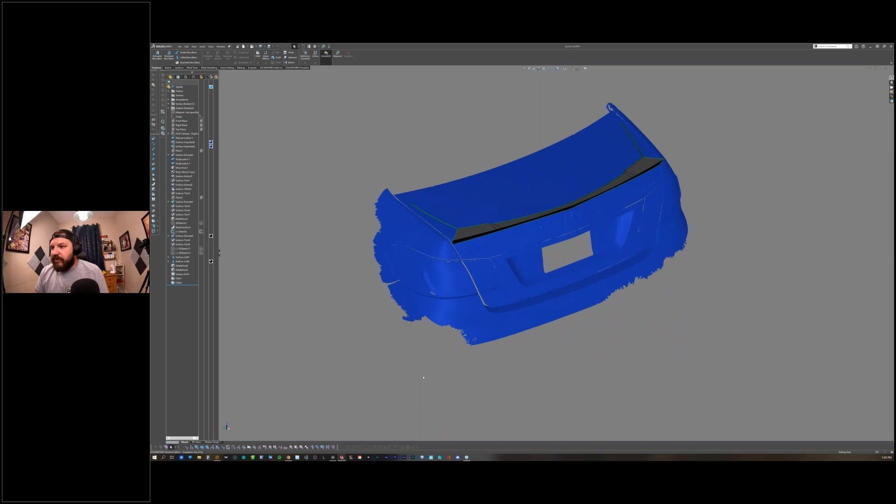I can probably show this on this project where I'm building a spoiler. I have the full scan, which is highly decimated because this is just for cosmetic appeal. And then if I needed richer data, I would extract what I needed.

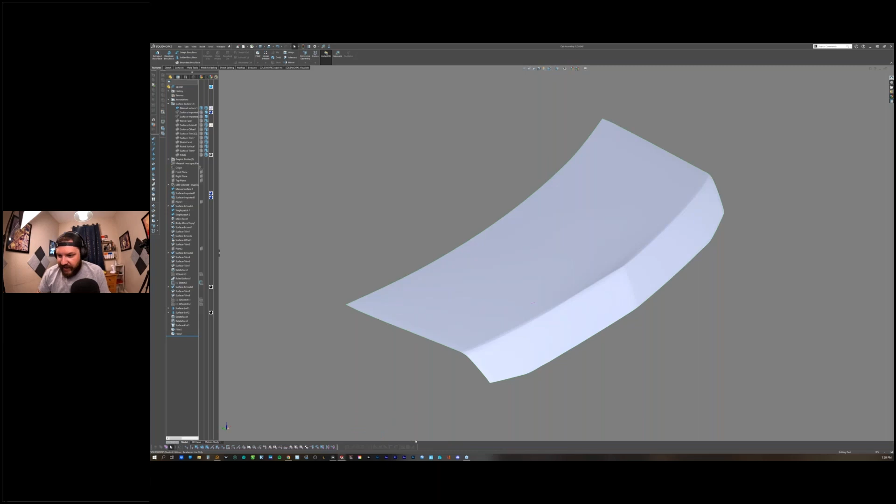Actually I have a better example with this cab project, where I have the full big decimated scan of the interior, but I also really needed this area to be accurate. So I brought that in separately, these kick panels, in a higher, denser fashion, and then created surfaces off of those.

Hey Jeff, what environment have you found that works well for scanning, or one that does not work well? Example: hard light outside, dimly lit indoor lighting, or brightly lit area indoors?

So I've noticed that indoors is definitely more preferred. If you're outside with a lot of sunlight just blaring down, it's going to be a little bit more difficult to get that scan. So yeah, I prefer indoors as much as possible.

I even have a canopy from Walmart that I'll bring out just to give me a little bit of shade. I've had issues in the past where I was scanning a car in the shade outside, with trees blocking the light. The different shade patterns were causing irregularities of the shutter speed basically, so it was picking them up irregularly.

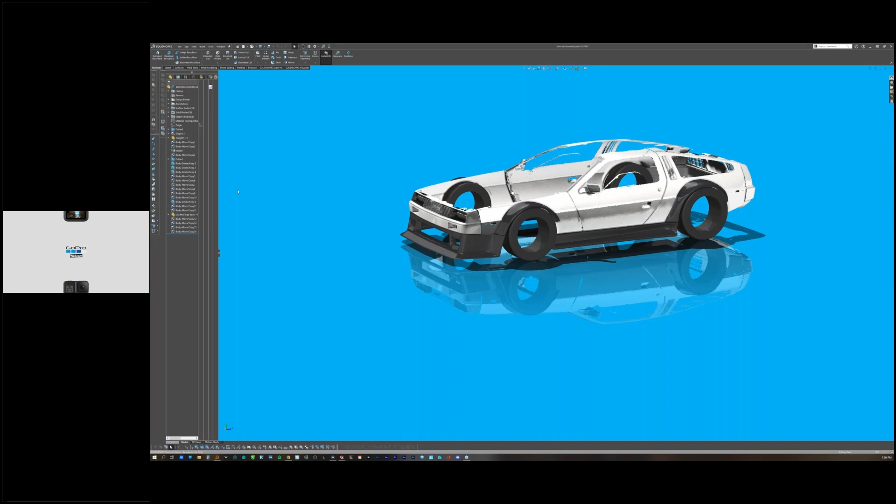About scanning outside, maybe if I can add something - this is another field of application completely - but we have lots of customers doing building restorations. As long as it's a cloudy day or you're able to create some minimal shade, you're good to go. So I'm assuming, Jeff, you scan mostly in garages, shops, so inside.

Yeah, I try to. I'm a big boy too, I don't like to sweat. I'm down here in South Florida, so that's a very easy call.

That's very easy to do outside. But yeah, the beauty of it is that I can go anywhere and scan your project, and then at the end of the day, I can be anywhere to work on my project.

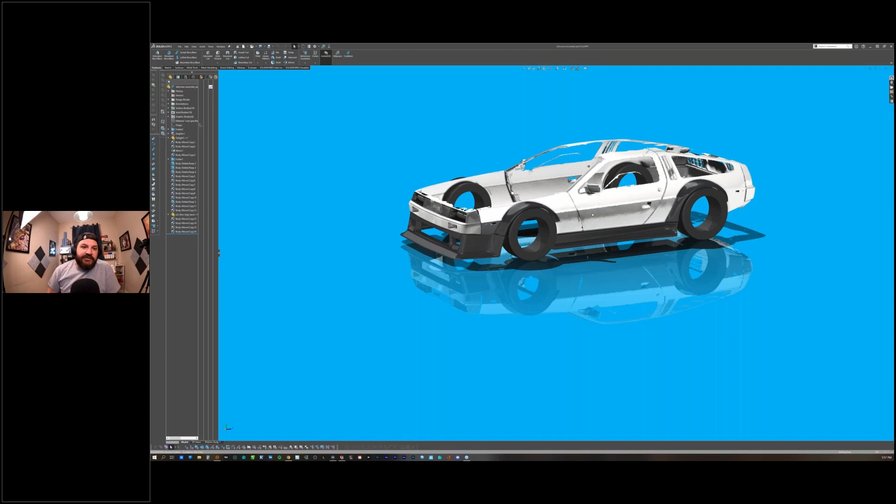So I have instances coming up where I'm going to California to scan a car, to work with a shop that was built in Texas. The work is going to get done inside a shop in California. And if I plan on taking a trip to Italy, I can continue my work, I don't need to be right there with them. It's going to be a very fun collaborative project for SEMA coming up.

So it's really opened up a lot of resources that I previously wouldn't be able to do. I mean, 10 years ago, or even 5 years ago, I wouldn't be able to just go to a shop in California and design their interior without actually physically being there. Now with the power, the Pelican case, it's carry on, I can keep it nice and close to me, I don't have to worry about people shoving it underneath. You're free to go anywhere, scan anything. And the options with 3D scanning are just endless.

It's being utilized in dentistry, in health, creating prosthetic legs. It's anything. It's really, really powerful how much broader the capabilities of what I can do expand my skill set. It goes way beyond doing hot rods and interiors, which are my niche and what I know.